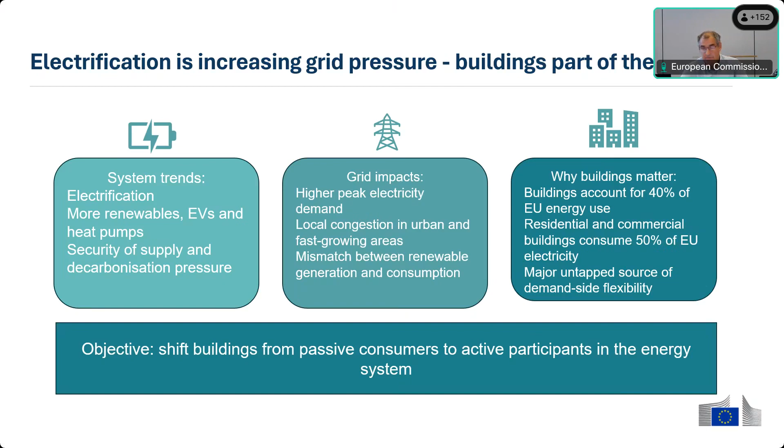I mean, these are of course not new, and you are very familiar with what is currently happening in the energy system. Of course, we already have quite an extensive policy framework in place for demand-side flexibility, for example through the electricity market design, and we are preparing new initiatives. I mentioned the Electrification Action Plan, but we're also working on a new network code on demand response. And here you see a number of elements that we are currently already working on.

One important element here is to improve data exchange between the different parts of the energy system for demand-side flexibility, in particular to facilitate automation of demand response. And there's quite a lot of work ongoing in that area, in particular the recommendations developed by energy and e-mobility experts on data exchange for demand-side flexibility and smart and bidirectional charging. But we have also put in place a code of conduct for EU smart energy appliances.

Now, this is of course all nice, but what is super important from our perspective is the actual implementation of all of these initiatives on the ground. So in this workshop, we will not really focus on these ongoing initiatives, but very much on concrete examples from across the EU on how this could be practically implemented. And the goals of this workshop tie into that.

The aim is very much to focus on and learn from practical examples, to identify barriers on the ground, and to look at actions that can be taken both from our side in supporting stakeholders, but also by stakeholders themselves. The aim is also to see whether the discussion today can identify projects that would be scalable and would fit in the context of the Better Homes partnerships.

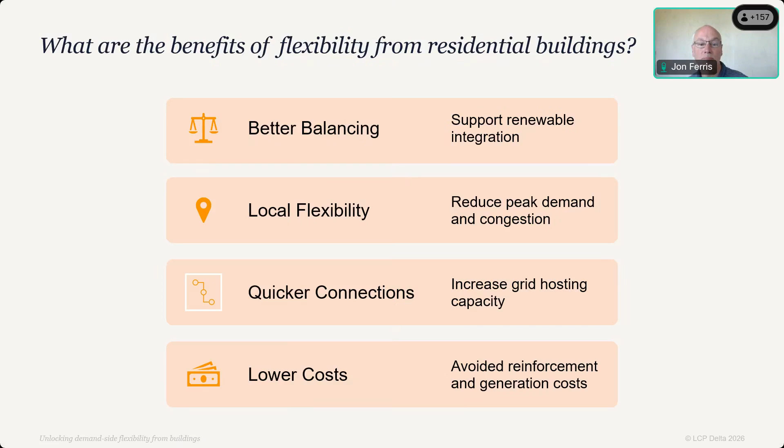the assets that consumers and their buildings can provide flexibility with have changed in the last 20 years. We've seen the growth of solar generation on people's roofs, bringing generation to the low voltage network, not just from the transmission grid. The development in batteries, both in EVs and at domestic level, has also changed the capacity for consumers to provide flexibility. But on a day like today, heating and cooling and the potential for flexibility within our buildings is an aspect that's maybe not developed quite as quickly as the more visible assets and the flexibility from batteries. And it's not just the new assets. We mustn't forget the increased controllability of existing assets in people's homes, whether it's dishwashers, washing machines, or water heaters.

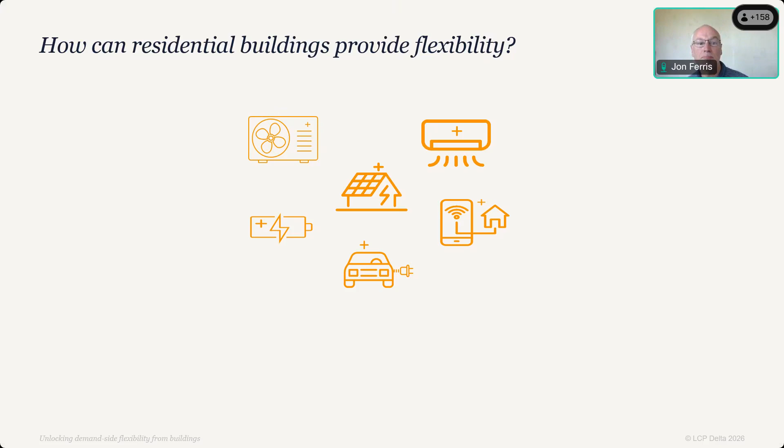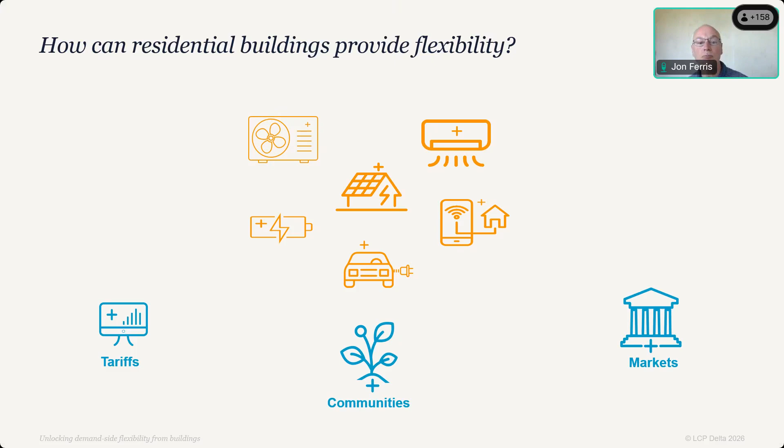And moving on to the value that consumers can get from flexibility. This can be incentivized from tariffs, from their retailers. To date, that's mainly been based around the wholesale price, but increasingly we're starting to look at using incentives in tariffs from networks. Access to markets has improved, but still for consumer assets is somewhat restricted and limited. And the growth of energy communities has also been quite slow, but the benefits of matching locally between demand and generation have never been stronger. And moving on to the next slide,

we still see a lot of barriers to residential flexibility. And to me, a lot of these are barriers of coordination. We need to integrate assets into the network and coordinate the network needs and the use of the assets. Even within the home, interoperability between different types of assets makes it difficult to coordinate within each home and between homes. We looked at the different types of markets, whether tariffs, markets and communities. We still see a lack of coordination between them, but perhaps most of all, it's coordination of consumers, of people who are asking to change their behavior, that's most important to bring flexibility into the mass market.

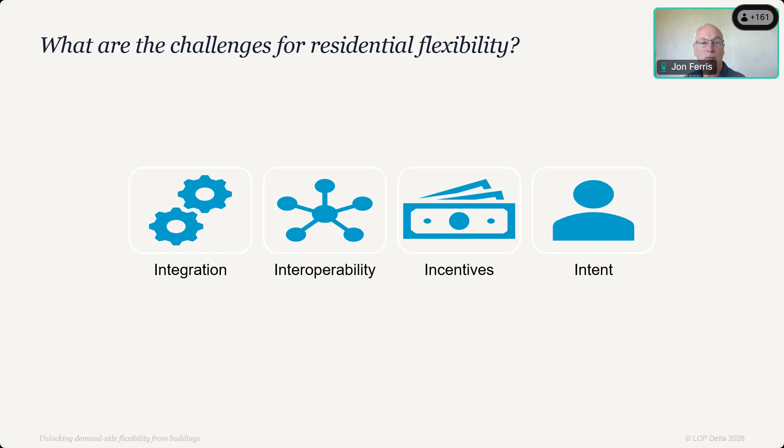So moving on to the next slide, we are going to start the round table, and it's with great pleasure that I will introduce first Margriet de Groot from the province of Utrecht. And Margriet, I think it's fair to say that you're really at the front line of dealing with grid congestion. Can you tell us about the impact it's had, not just on the energy system, but the societal impact that you're facing and having to deal with?

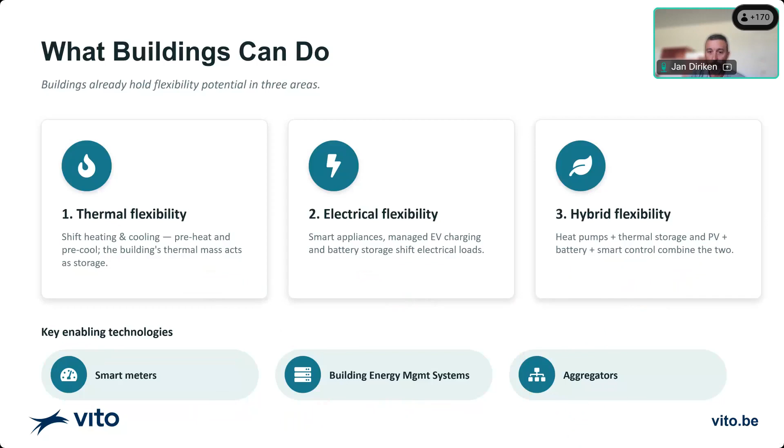The last one is hybrid flexibility, where often a lot of big opportunities lie. For example, this includes combining a heat pump with thermal storage or solar PV with batteries and smart control. Now, in order to use flexibility, we need some key enabling technologies. Firstly, we need smart meters to actually measure what is going on. Next, we need building energy management systems to control assets and appliances which are available in a building. And lastly, we need aggregators which can combine many small actors in this field and participate in the market. I think aggregation is really something which connects all the examples I will give in this talk.

I will focus on 4 examples across Europe. I must admit they're mostly across Western Europe, with Voltalis being an aggregator in France, which combines residential demand response from electrical heating. Jedlix, which is now part of Kraken Technologies in the Netherlands, focuses on smart electric vehicle charging. There's Next Kraftwerke in Germany, which combines commercial buildings via BEMS. And the final one is a smaller pilot from Belgium, where I'm located, which is a very lightweight system for using residential heat pump flexibility. But we'll go deeper into these in the next few moments.

So first, let's start with France and Voltalis. I think this is one of the most established examples of how residential demand response works in Europe. It shows how everyday household consumption, like electric heating, can be aggregated into a large-scale flexible source. Now, how it works: Voltalis installs a gateway and controllers in houses to control electric heating devices and electric boilers. It does so by shortly modulating the consumption of these devices. The impact on an individual level is quite small, but when you aggregate this across hundreds of thousands of homes, you can end up with a very valuable source of flexibility. Currently, this leads to a 1 gigawatt virtual power plant.

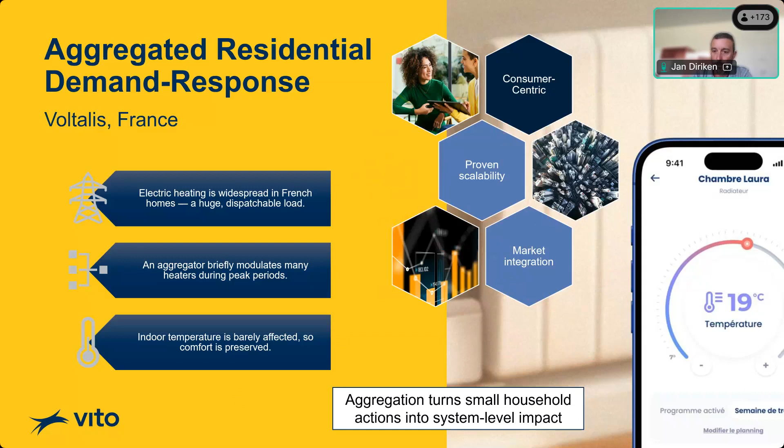Second example is Jedlix, which I said is now part of Kraken Technologies. And this company provides a smart charging platform that unlocks flexibility from these electric vehicles. So what users do, they connect their car and they indicate when they want to have a full charge or when they need their car charged. And Jedlix will automatically optimize the charging process based on prices and the system needs.

Now, also, one electrical vehicle is usually not a very big consumer, but if you can coordinate hundreds of thousands of cars, this actually becomes a very big source of flexibility and also one of the fastest growing electrical loads in Europe.

That being said, it's very software driven, but there are also some barriers. Mainly that there's lots of car manufacturers, lots of different charging stations, so interoperability remains a challenge there. Also, the uptake of EV is not very similar across the EU, and it's mainly driven by that. And also, you need to convince users to trust the system that their car will be charged when they actually need it.

Now, like the previous example of Voltalis, this example of Jedlix focuses on a single technology, and that's where the next example makes a difference. Now, Next Kraftwerke shifts actually from these individual technologies to a full system integration, and it's an aggregator that operates one of Europe's largest virtual power plants, connecting thousands of decentralized assets, such as renewable generation, storage, and industrial demand, into a single flexibility source.

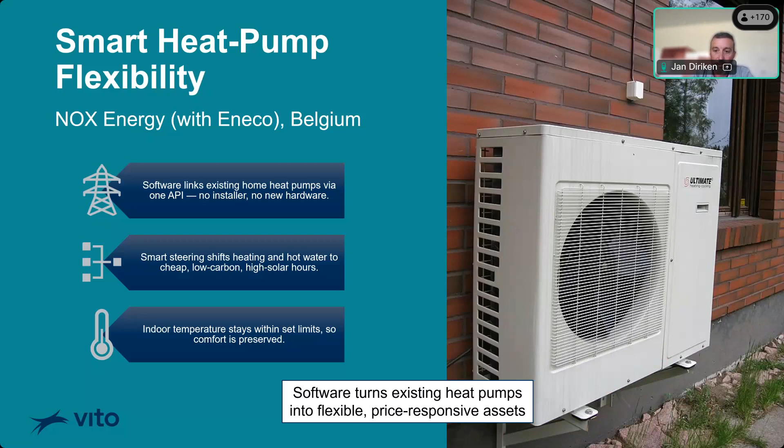And it allows them to shift heating and hot water to moments when electricity is cheap, clean, and abundant. And it happens automatically while keeping the indoor comfort within user-defined limits. Now, the main idea here is that software alone can enable existing devices to become flexible and price-driven responsive assets with a very small additional cost.

So if we take a step back from these examples, we can identify a few key points that stand out. So first one, I would say flexibility is no theoretical concept anymore. It's already being deployed today, as these examples show, which I discussed briefly. It's working in homes, in EV charging, and commercial buildings. Now, what is crucial is the part of the aggregation, and individual actions are usually small, but when they are combined, they become actually meaningful from a system perspective.

At the same time, we have some important barriers. There is the fragmentation across the member states of the EU, which makes it sometimes difficult to scale these solutions across Europe. What we also see is that sometimes price signals are weak or missing, so there is no real strong incentive to participate. Finally, there are some challenges about complexity, interoperability, and deployment cost, which also can lag or hinder the drive towards using actually this flexibility.

Now, finally, I would also like to say something about what we are currently doing at Vito in our research, and it's actually built on these two concepts. One is the whole building flex orchestration, and grid interactive buildings. Now, what we've seen in the previous examples is that a lot of these solutions focus on a single asset, like controlling a heat pump or charging your electric vehicle. But what we want to do is actually combine all these assets and also consider the non-controllable base load of a building, because that actually defines how much flexibility you have. And that we combine in a single solution.

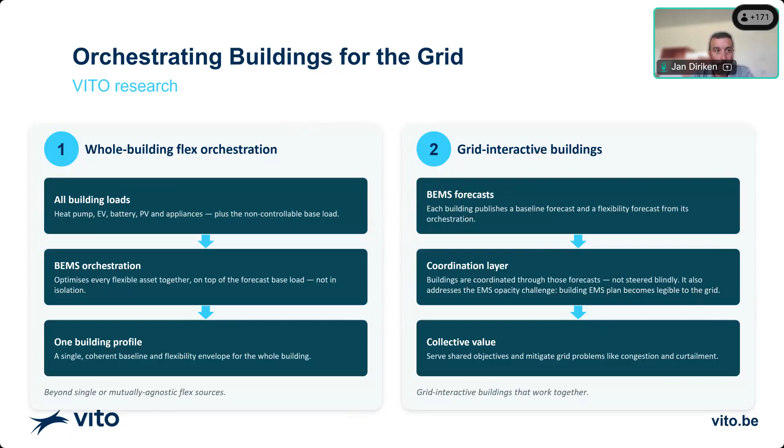So I went a little bit over time. I hope it's still okay.

But I think what I wanted to do in this introduction is show that flexibility actually exists. Aggregation will unlock it, and coordination is what can scale it all.

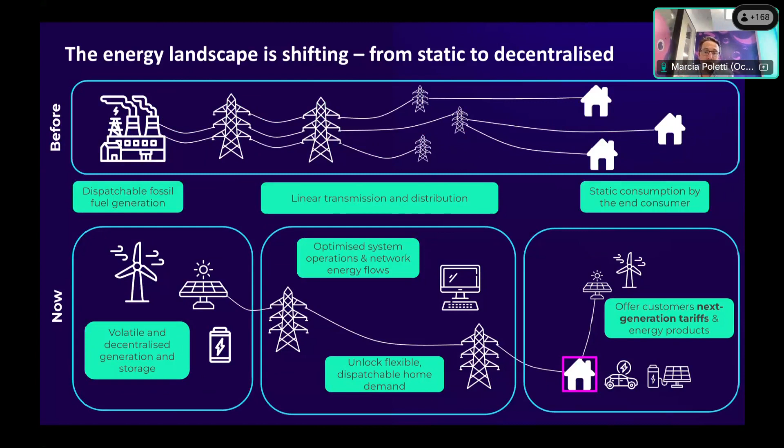And one of the key things that's been mentioned is how do you drive that consumer benefit, and that is largely around, we've got to unlock the financial business case for Octopus. We're not doing Zero Bills Homes just for the benefit of the customer. It needs to be financially attractive for Octopus as well.

So what we're trying to do is, how do we make use of that time when the wind is blowing, like Storm Amy and Storm Benjamin that came through, when prices went to 0 or negative? Can we run a heat pump at that time, heat up the hot water, charge batteries, and then can we discharge in those peak windows? And even in the still and cloudy, dunkelflaute period we had in mid-October, the price overnight was still almost half that of the standard average price. The real opportunity exists if we can load shift for us to unlock that.

And if you can generate enough power and sell that at peak to cover the cost of importing at off-peak, you can get to a point where you can cover all your energy costs and be able to offer a customer a zero energy bill. And we now have a really wide range of tariffs available in the UK and in many European countries as well now, which are very much focused around how do we service the devices that the customer has got in their home to best suit their needs.

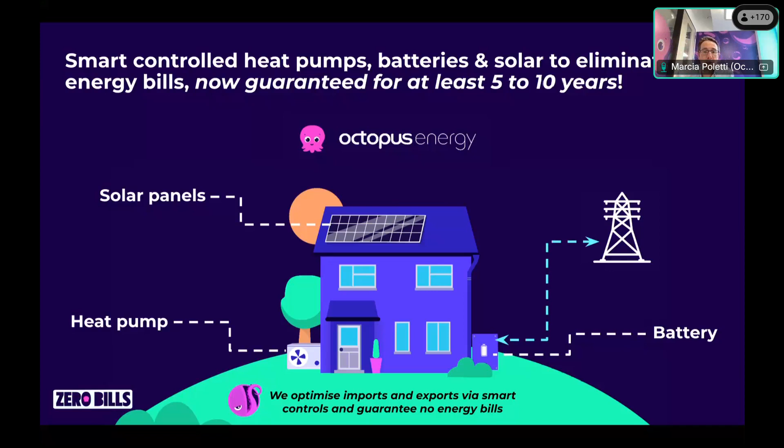One of the key challenges is you do need to make it economically attractive for all the parties, and it needs to work for you as an energy supplier. And some of the access to markets and the energy price signals are critical, and Marcia will come on to talk about that. So we are live in the UK, Germany, France, and New Zealand.

We're exploring opportunities in Italy and USA as well. It's tricky in Spain and Japan, and we'll come on to some of the reasons why that is at the moment. And it's certainly easier in some countries than others.

Generally, you run out of roof space on certain house types for enough solar to make the economics work. And that's the challenge, particularly on retrofits, because on a retrofit home, the insulation obviously isn't as good. The heating goes up, and potentially the cooling as well. That makes it a difficult challenge. But in new builds, it is relatively straightforward to do.

And one of the key things around how this is helping the grid is we're finding this is a sort of beacon product, a sort of inspirational product where people are looking at zero bills homes and referencing zero bills homes as an aspiration in a similar way that many architects point towards Passive House.

I think zero bills makes a zero carbon home much more tangible, and it's enabling the funded rollout of these technologies. We're unlocking the financial benefits of these technologies to enable it to be rolled out in new homes at scale, and looking at rolling it out into retrofit.

Also, new housing developments are often causing problems to grids. They're adding extra loads in areas already under constraint, whereas if we are generally exporting at peak time rather than importing, on a timed basis, we're actually supporting the overall grid and not adding significant loads to peak. In fact, we might be helping reduce peak loads locally and providing that local demand flexibility and ability to support the grid.

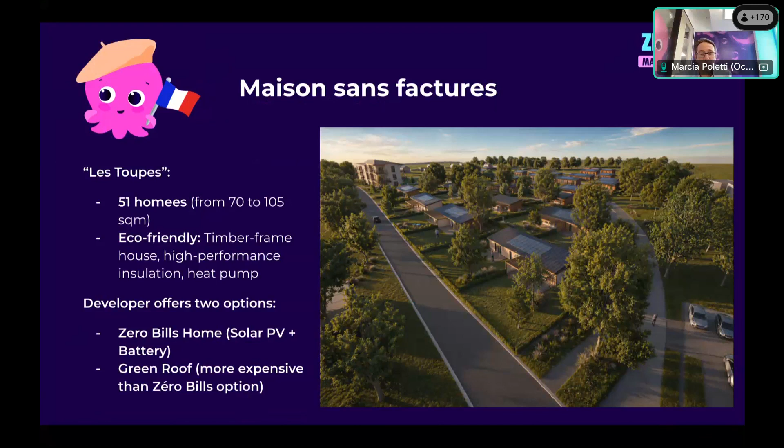And interestingly, the zero bills option is cheaper than the green roof option. So we expect a lot of customers will go for the zero bills option. We've worked with the 2 biggest house builders in New Zealand and have now got zero bills homes with both of those. They're now available. Recently done that with Fletcher Living.

The New Zealand example is interesting because we've done both North Island and South Island. You've got quite a different climate between the 2 islands in New Zealand, and the North Island is quite hot. You've got quite significant air conditioning, quite humid, so perhaps more similar to the southern parts of Europe. But the economics do work. You get much better solar there as well, and that offsets the air conditioning requirements as well.

So I think I'll pass over to Marcia, and she can talk through the barriers. So it's been really good listening to everyone talk this morning about the challenges they're finding with flexibility and with customer propositions. And I think there was a comment that was made by Jan just earlier, saying, you know, flexibility is real, it's here, it's valuable. And I think the real challenge is there are many barriers to seeing that system value translate into something for the customer. And unless we can address those barriers, it makes it hard to roll this out at scale.

So Nigel also said, look, in Germany, we're doing sort of 6-year zero bill homes, and that is reflecting the markets that we can access. So I'm going to talk through some of the barriers, and then we'll look across Europe at a few selected countries to look at the individual problems that we face.

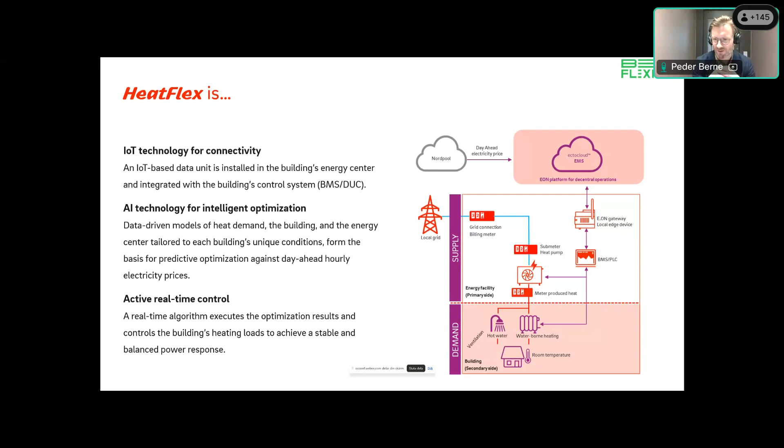One other important capability is of course the optimization. And here we have a data-driven model, which I will go through a little bit more in detail. And with this data-driven model, we can execute the optimization. And in order to do so efficiently, a third capability that is key in this is the real-time control. So the real-time algorithm executes the optimization and affects how the building heating system is activated over time.

So the optimization is done mainly with 3 different input data. We have the energy market and prices that go into the thermal flex optimization model. We have data that is important for the energy forecasting, weather data, historical energy data, and so forth. But also essential is the ability to gather data from the building and understand the building's local prerequisites, such as how is energy used in the building over time, what is the thermal inertia, and based on that, how much flexibility can we gather or establish in the building. And that's the calculations that are done in the thermal flex optimization module. And the output of this data-driven optimization is then the flexibility activation schedule.

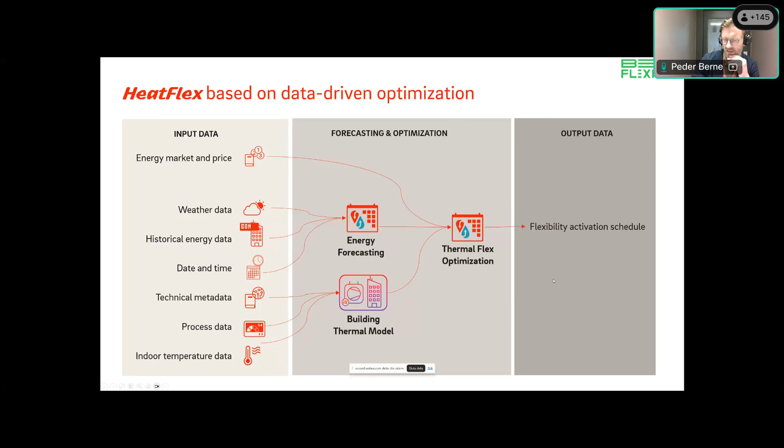Moving forward, so HeatFlex was one out of several pilots in the Be Flexible project. And to wrap it up, we had 9 customers, more than 30 buildings, and connected around 60 heat pumps in this pilot. The use cases, I mentioned them a little bit earlier also, were both behind the meter optimization and also offsetting flexibility on the local flexibility market. All in all, we had around 1.5 megawatt connected distributed assets in power. And we ran the pilot between February and March 2026. Also important for the pilot was to really connect the heterogeneous setup. So working with different vendors, different types of buildings in order to understand how we can scale forward after the pilot.

So starting with the first pilot with the behind the meter optimization, it's quite straightforward optimization based on the day-ahead prices. And in this graph, we can see that when the prices are high, this blue greenish graph here, then we could offset the heat pump to produce less during those hours. But we could also increase production when the price was low, so we charge the building with energy. In that way, we really even out the time of use of the heat pump and can optimize the cost on the customer side.

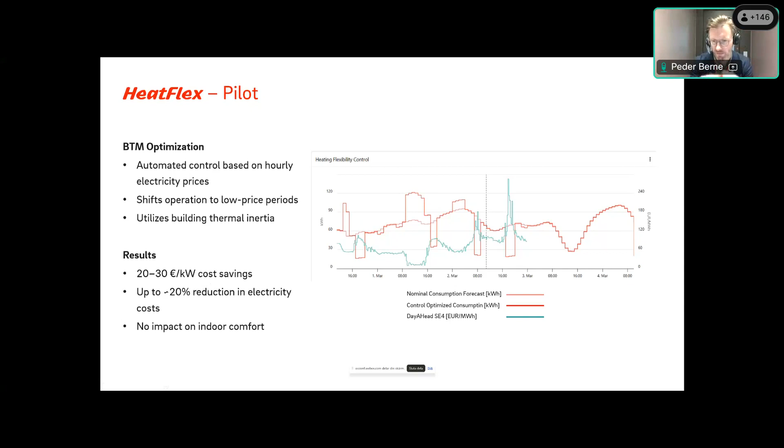The result was that we achieved around 20 to 30 euro per installed kilowatt in cost saving. And that relates to approximately up to 20% reduction in electricity cost. And we did all this with no impact on the indoor comfort. So that relates to 100 kilowatt installed power, maybe 2,500 euro a year approximately in cost saving.

Moving forward to offsetting the flexibility to local flexibility markets, this was done in 2 residential complexes in the city of Malmö with ground source heat pumps. I think we really proved that we could do this successfully, and we piloted this winter and created an additional 12,000 euros in revenue. So on top of the day-ahead optimization that also was done in this pilot.

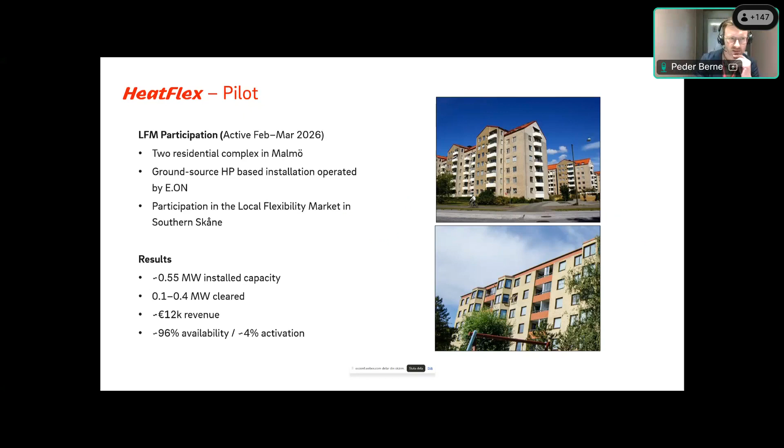Maybe to wrap up the pilot a bit, I think we could prove in the pilot that the heat pump provides reliable flexibility. It has a good advantage to have the linkage between heat production and power, really enabling utilization of the flexibility on the thermal side with the thermal inertia in buildings. We also showed that we developed a solution that could communicate and act towards different vendors, different types of buildings, but also, as several of the earlier speakers and Yvonne mentioned, standardization is of course key here in order to easily connect different types of systems on the distributed side.

Also, installation integration. This is a key bottleneck. I think we heard about the need for a seamless integration end to end here. I think it was Delphine that mentioned that. I think that relates quite well to the need we see here in order to be able to scale this solution efficiently also. And of course, we are working in collaboration with installers and so forth on the more practical hands-on side there. Customer impact is minimal. Transparency is crucial. We need to put an effort moving forward to develop further the customer user interface.

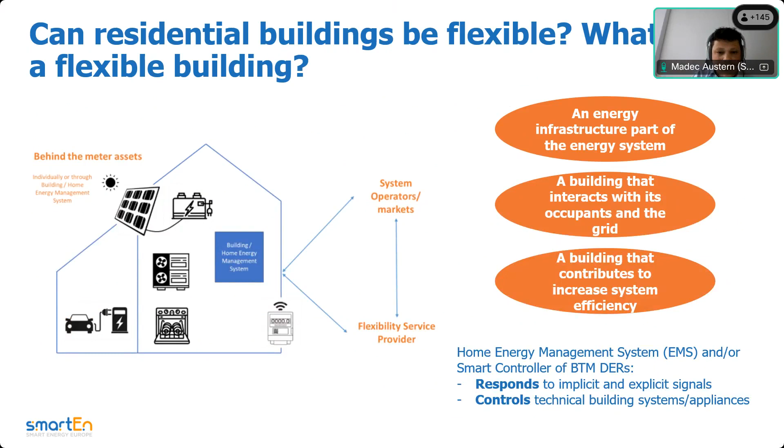This is a bit of a reminder. I think everybody understands what flexibility in buildings looks like, but I just wanted to make the point obvious and clear. We're talking generally about either directly controlling an asset, but we can also talk about a home energy management system that controls the entire house and provides that kind of demand side flexibility for the entire building. This is less what we're going to talk about today. We have more examples in the single asset, but just to bring that in front of everybody's mind.

Again, sort of a reminder, but the benefits of flexible buildings are huge. The grid, everybody knows those: network congestion, network costs, investment costs. But I want to make the point that in buildings, especially residential buildings, we have this additional dimension, which is we are actually providing benefits to the consumers. That's in terms of reduced energy costs, lower carbon footprints, increased affordability of homes. And that's a benefit that really makes flexibility in buildings a win-win, both for the system and for everybody there.

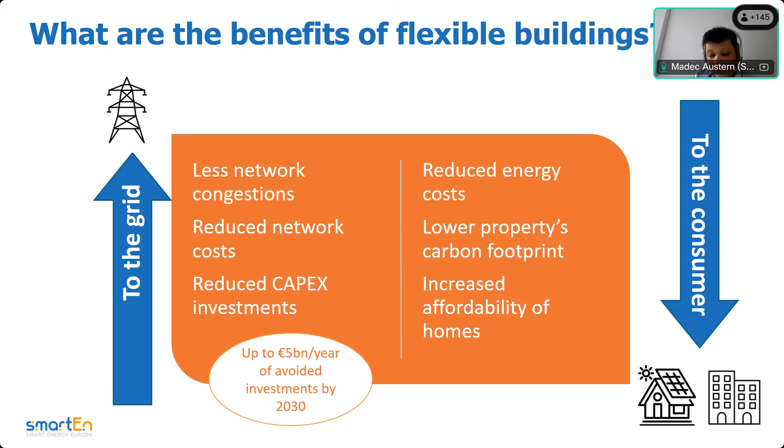The first one comes from the Netherlands with EVs. The big problem here is obviously you have EVs in the system. That's great, you have more and more EVs, but generally in homes, they all charge at the same time, which potentially creates congestion in the grid and can cause some serious issues. So here we have a member, gridX, partnering with Essent, who are deploying the chargers themselves to provide implicit flexibility. That would be adapting the car charging based on the price of electricity and therefore on the demand on the network itself.

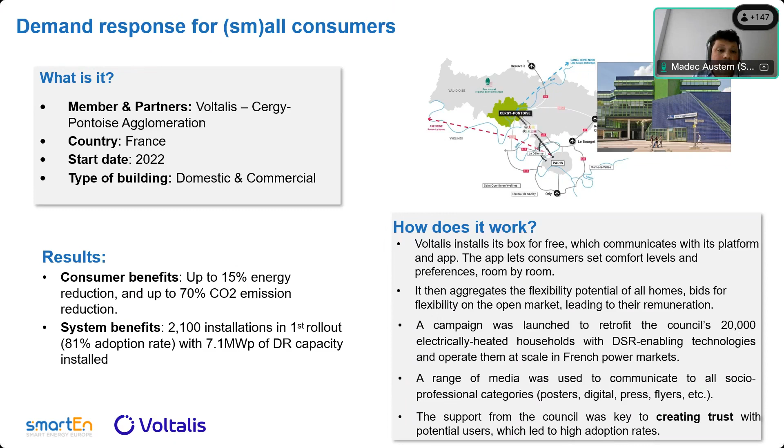But we also have to have those conditions in place, because they found that citizens will really be reluctant to pay for the services. They want an installation box for free. And for that to happen, we really need to have the business case on the market side.

I don't know what the time is, so I'm going to move a bit faster.

Here we're moving to, still in France, the social housing example. This has the added benefit of creating more affordable housing for people in need, which is also a key priority of everyone here, I'm sure, and in the EU. This is a partnership between Elax Energy, so Delphine that you saw earlier in the round table, and RIVP, which is a major French social landlord with about 75,000 homes.

They started with a pilot project of 20 units in 2022, and now they've reached a massive scale of 16,000 homes, with 22,000 homes signed. So there's still some installation going on. All of that is on multi-family social housing buildings. Elax Energy focuses on electric water heaters and provides flexibility on that, using the aggregation of all these 22,000 homes, or 16,000 at the moment, to provide flexibility on the market and be remunerated that way as well.

For the results in that pretty large project, tenants see a 26% reduction in their consumption for water heating, because when you become smart in the way you heat, you also consume less, since you don't always need to be heating your water, with zero impact on their comfort, which leads to a reduction of their bills of about 70 to 100 euros a year per household. And by consuming less, you also extend the lifespan of your electric water heater by about 4 years, which is pretty impressive.